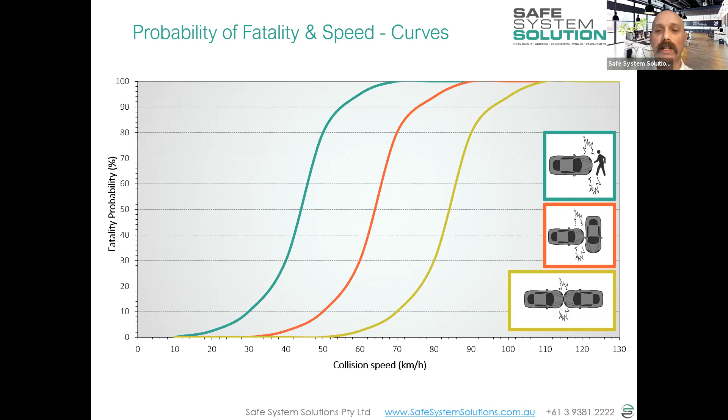And we've got some more information about angles in crashes, vulnerable road users in crashes, and crashes with poles, side impact with poles and the like. That's all in the mix to help you understand that severity score you're going to give for the crash type you are envisaging in the design or in the existing conditions. And it's not meant to be that you say above that speed everything is bad, and below that speed everything is fine. It's a sort of spectrum.

It helps you get some clarity around the scoring. And as I showed you, and we've uploaded there, we're playing around with some sort of graded scoring sheets in terms of colours to help just give that impression of a general indication.

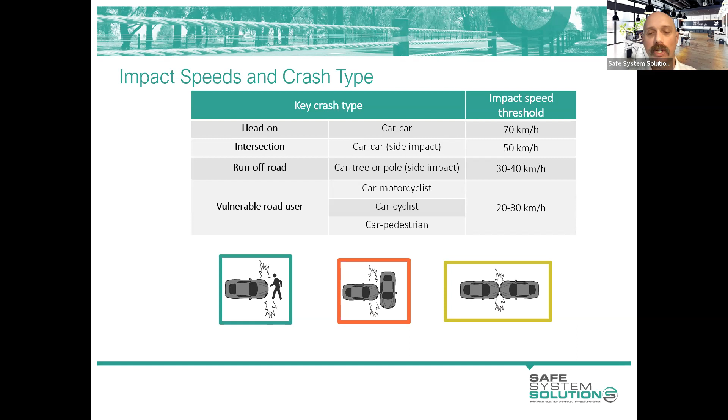So I think from those early sessions, looking at some of the specific vulnerable road users and their characteristics, looking at treatments and categorizing them into impacting on exposure, likelihood and severity, I think we're pretty well placed to jump into now the mechanics of the safe system assessment.

So the overarching document that a lot of you will be familiar with, or at least know exists, is the Austroads Safe System Assessment Framework 2016. As I say, this, along with a lot of sort of new tools being produced, was a first release, and there's been some discoveries of elements that maybe could be improved. Now some of them, the industry has done a little bit of work on, and we've got more clarity around them, and we've established a generally accepted way of operating, and some of our fact sheets help with that.

The local jurisdictional guidance, I think, helps with that too. So the Victorian guidelines and the South Australian guidelines - apart from the front cover, these documents are pretty much the same. So that helps us in a bit of sort of industry way to do safe system assessment.

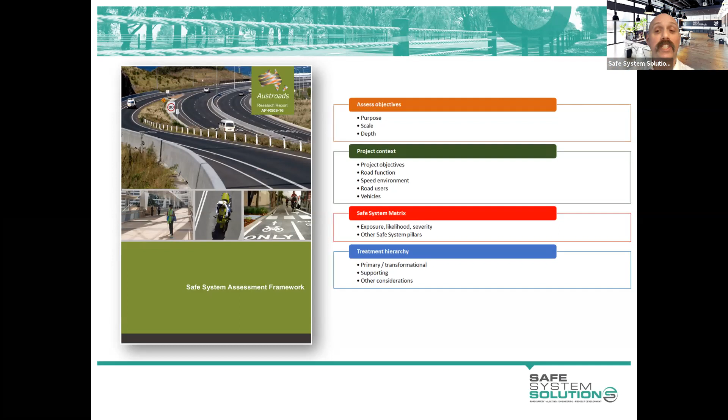In one sense, it is just a risk assessment methodology. It's just got some tweaks and some specifics around it that focus it in on, or make it more appropriate for roads as opposed to general risk assessment, and some of those safe system principle alignment with those.

So the first thing you do in a safe system assessment is to start to document or understand the purpose, the scope of this project, and the context in which this project is being undertaken. The Austroads document has these prompt questions. You are free to add prompt questions, find out other things, but you've got to paint a bit of a picture of what's going on in terms of what's the project, or if you're just doing an existing condition safe system assessment, what are the existing conditions, what are the aspirations for that, and the like.

This is where you'd put in things like movement and place categorization, or road use hierarchy, or road function, growth, land use, different amenities, speed conditions, speed limits, any data you have, any modeling that might be available to get an understanding of changes that could be happening, the types of road users that are there, vehicle composition, or any other things that help set that context of the project.

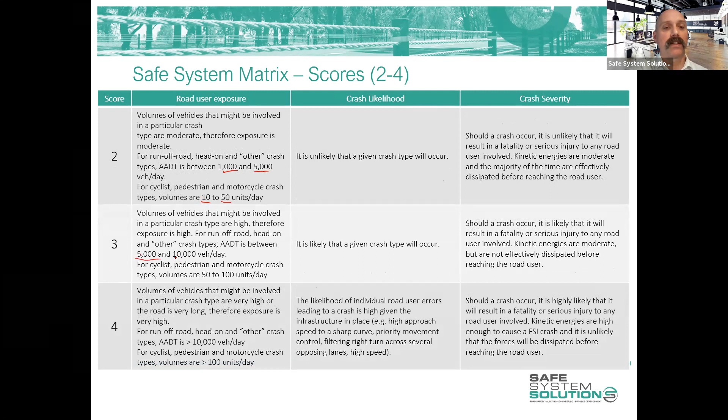Now remember, these are scores just to help indicate risk. So going up to 2, 3, and 4, you can see a 2 is between 1,000 and 5,000 AADT for passenger vehicles, between 10 and 50 for vulnerable road users. A 3 is 5,000 to 10,000, and a 4 is above 10,000, and 50 to 100, and 100 plus units a day crossing or being exposed to those crashes.

Now there's a bit of debate around these numbers and whether they're right - 10,000 vehicles a day in the scheme of things isn't a huge number on a lot of the major arterials or the like, so there's a lot of projects that get a 4 across the board for exposure, certainly in a lot of the crash types, but they are what they are for now, and they're fairly clean cut in how to get to that score.

So some of you got a bit of feedback in your assignments about exposure, and I think you complicated it a bit more than you needed to. If you had seen and read this, it probably would have cleared things up. But really the exposure is just saying, here's the number and it correlates to this, and that's the exposure score. It's as easy as that.

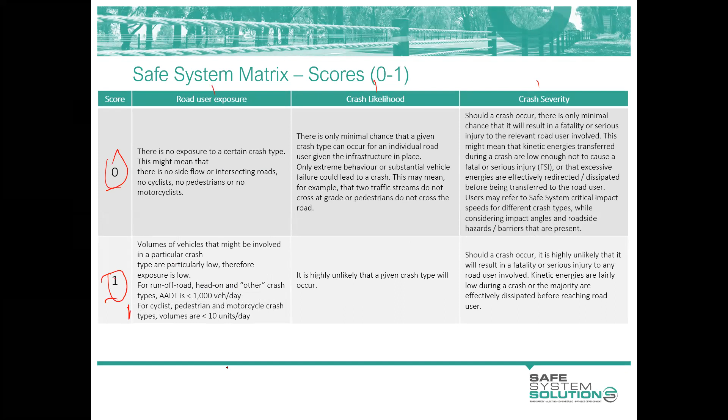A score of 0 means there is no exposure to a certain crash type. That might mean there's no side flow or intersecting road, no cyclists, no pedestrians, no motorcyclists. So you might be doing a mid-block section of freeway or something where there's no side road, so there are no intersections. Your exposure to intersection crashes is 0.

It may be that, let's take a motorway where cyclists are banned, and you genuinely don't have any cyclists on the motorway. That would be a 0.

Now, it's pretty rare to put a 0, but maybe that motorway cyclist example is a good one if you've banned cyclists and they generally comply. But people say, what about that random Dutch tourist who arrives from the airport, puts on their backpack and rides their bike down the motorway? With those sort of things, it's probably not enough, once a year that something will happen, to warrant scoring it above the 0.

But I might make a note of that in some of the other areas within the Safe System Assessment Report, which are less quantitative but more qualitative. And it wouldn't stop me making a recommendation if I thought that very random event could be something to be thought about.

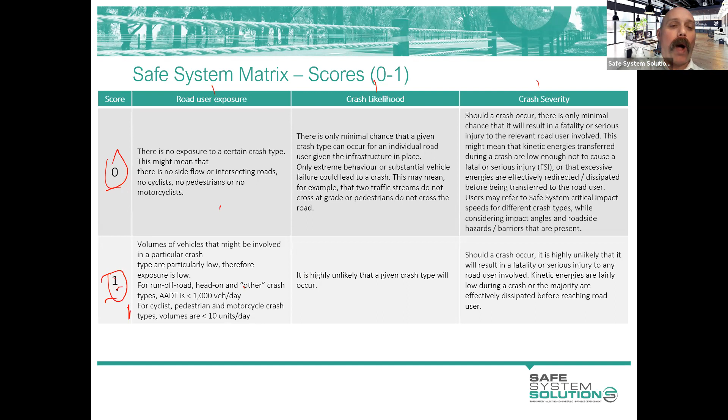So let's have a look at one for the likelihood scoring. A 1: it is highly unlikely that a given crash type will occur. That's it, that's all the information you get. Let's go up to a 2: it is unlikely that a given crash type will occur. A 3: it is likely that a given crash type will occur. You can immediately see the subjectivity to this, can't you?

A 4 has a little bit more information to it, doesn't it? The likelihood of individual road user error leading to a crash is high given the infrastructure in place, e.g. high approach speeds to a sharp curve, priority movement control, filtering, right turn across several opposing lanes, and high speeds. So you get a little bit more of an indication there.

A 0: there is only minimal chance that a given crash type will occur for an individual road user given the infrastructure in place. Only extreme behaviour or substantial vehicle failure could lead to the crash. This may mean, for example, the two streams do not cross at grade, or pedestrians do not cross the road. So some of that could be pushed into the exposure score to a degree, but the reality is it's very, very rare.

I don't think I've ever given a 0 for likelihood, and that is because we are dealing with humans and they make mistakes. So there's always that something there. But you do this as a relative score, a likelihood score. So the reality is that...

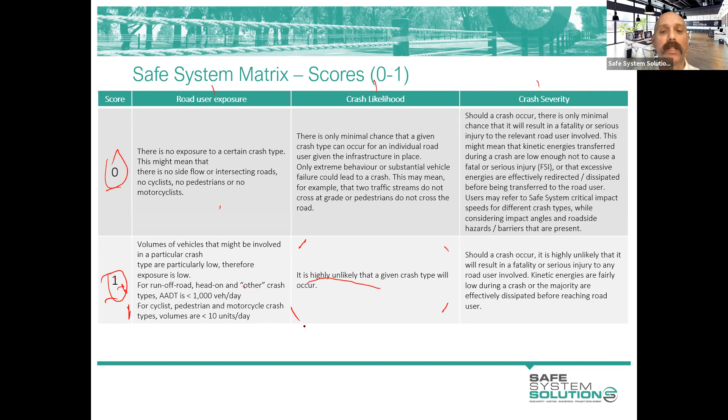So you get there and you start to mark your scores. Maybe 2, 1. No, let's give that a 2 because head on. No, if it was a low volume road, you'd probably put your head on lower than your runoff road, obviously, because your runoff road could happen all the time. But for a head on to happen, it would need the opposing vehicle there. There's that research paper I referred to earlier saying around 6,500 vehicles a day is actually where that change happens.

Intersections. Now the intersection, we've taken the intersection score from the addition of the mainline AADT plus the side road AADT. That was, again, a bit unclear - that one's probably still up for debate. There's a lot of people who say, well, no, it should be just the minor road, because you can't have a crash without a vehicle coming from the minor road. But nonetheless, we produced a fact sheet on that as an interim stopgap before the jurisdictions in Austroads actually make some decisions on that.

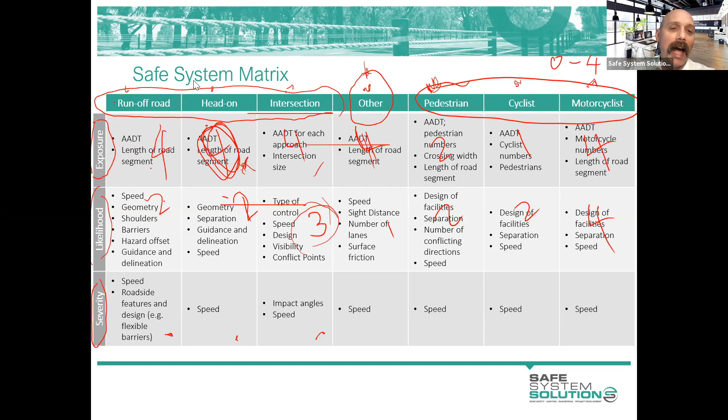I'm going to go a 4 there because runoff road into poles and trees can be pretty severe. The head-on's down at a 2 because it's less. This is a complete hypothetical, I'm just rambling things off the top of my head at the moment. It would be absolutely about analysing your thing.

Intersection, we're going to go in between as a 3. Other, we're going with a 1 because maybe we're just thinking about side swipe crashes and we know that they're quite a low severity crash type. Pedestrians, we're going to go a 4, cyclists a 4, motorcyclists a 4 - vulnerable road users - and maybe the scenario is somewhat high speed, so when the crashes happen, it's going to be bad.

And so you've managed to sort of score all of the cells of the matrix. And then you go about multiplying - you multiply the exposure by the likelihood by the severity to get an end score, and you get 32 off that one, would you? 16, 16, 32, yes. So you've got 4 times 2 times 4 is 32, and you go about doing that for all of them.

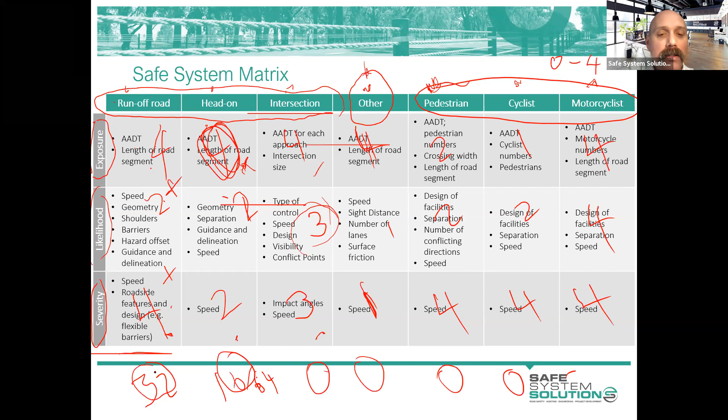It's starting to get a messy slide. So you get a score out of 64 for each of them, and then you add all of these scores up - add them across the bottom to get a score out of 448. 0 being perfect alignment with safe system principles, 448 being the worst alignment with safe system principles. Your project will be somewhere in that spectrum.

Now, you can see in the severity score in the reference sheet, you've got some information. Again, it requires you to have an understanding of biomechanical tolerance of injury and crash forces and kinetic energy, which you all have now. Should a crash occur, it is unlikely that it will result in fatality or serious injury to any road user involved. Kinetic energies are moderate, and the majority of the time are effectively dissipated before reaching the road user. That would give you a 2.

And you can see it goes up there to 4, being: should the crash occur, it is highly likely that it will result in fatality or serious injury to any road user involved. Kinetic energies are high enough to cause fatal serious injury, and it's unlikely that the forces will be dissipated before reaching the road user. By meaning dissipated before they reach the road user, that's sort of energy absorption through barriers, through impact absorbing features, crash cushions, attenuators, or angle of crashes. So the energy's obviously still there, but it's just dissipated out into the environment or something like that.

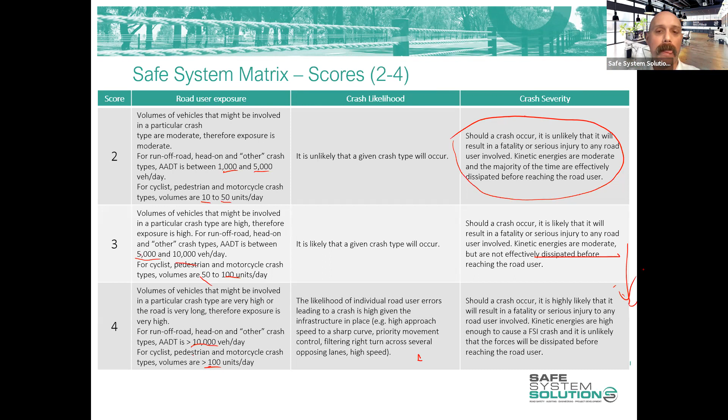I'll pause there before I show you an example of a completed matrix and see if we've got any comments or questions at this stage.

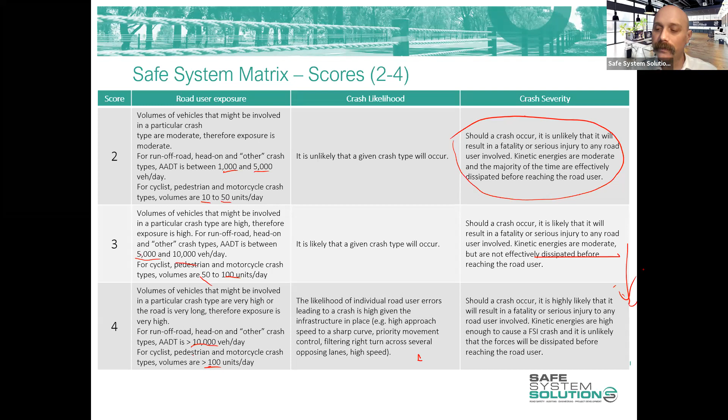Thanks, Ken. Where do e-scooters sit? Are they pedestrians or? Okay, so it's a good question, very good question. You get to make that call. If you believe you want to just say this is a different road user - tempted to lump it into the pedestrians as we do a lot of the time - but no, it's specific. The volumes are there to warrant it being categorized as its own thing.

Use the other category, and then when you do your AADT, put in your estimate on the number of e-scooters. And then obviously things like your severity will be influenced by their vulnerability, the likelihood by how they're being used and the infrastructure that's in place and those sorts of things. So you can sort of focus on and isolate it within that.

Now this is probably going beyond what we should be, as we're just entering you into doing this sort of stuff - there is the ability to do a single matrix for a road user like that on its own. So you could, in theory, take e-scooters as your entire matrix and do a full matrix on e-scooters, the way I was talking about doing motorcycles, but even bigger and wider than that. But you would then be looking at what is the exposure of them, and the exposure is just going to be how many are out there, so that'll probably be the same.

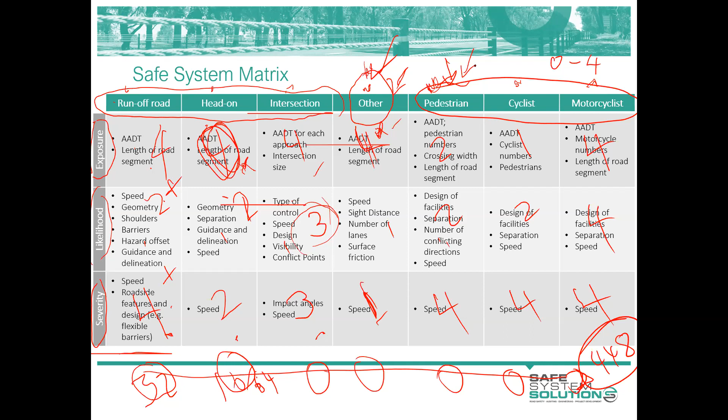Okay. Can a project have more than one safe system matrix completed? Absolutely. We did 61 matrices for Northeast Link, which is a $9 billion road project being planned here in Melbourne. 61, I think it was.

And that's certainly appropriate for the length and the changes in homogeneous sections and the different intersection forms and the like. So again, we've done a specific fact sheet on how you deal with a long project that has changes in land use or multiple intersections in the project length that are completely different. Really, there are two options - I have a colleague who likes option 2 and I like option 1. Option 1 is just to break it up into homogeneous sections and then do a matrix for each.

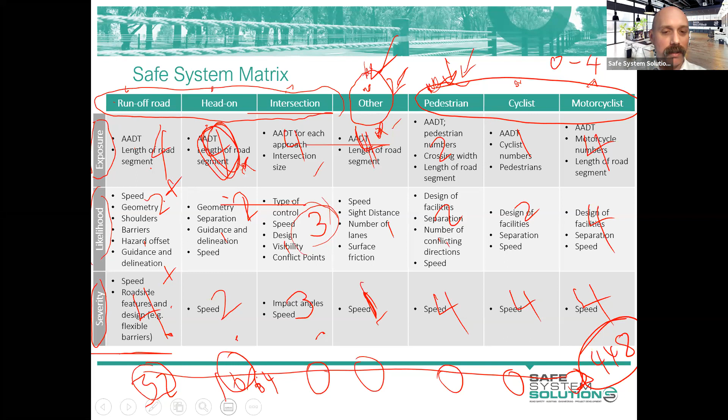And you can make a nice little graphic of that. Let me clear this - sorry, bear with me. I'm going to draw right over the top of this. You've got this length of road, and it's got an intersection there and a different intersection there, and you've been asked to do a safe system assessment on this whole upgrade.

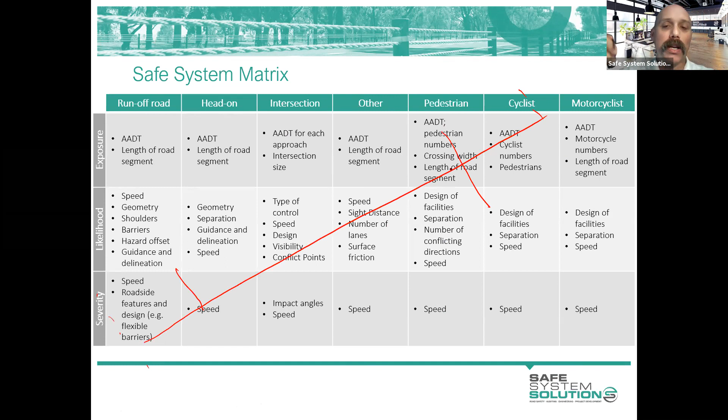Well, then you can say, I'm going to split this into 2 sections or 3 sections, depending on how you want to do it. I'm going to take all of this as one, and do a little graph of that - you'll see the graphs later as I show them. These are the results, basically.

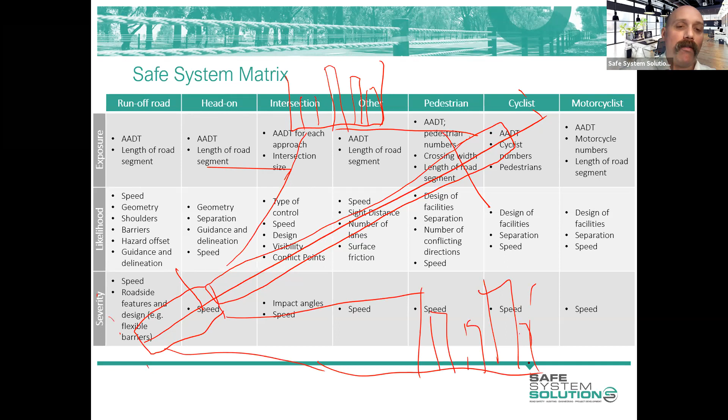And I'm going to do this intersection and this little lead into it as another, because it's a different scope, and then create a nice little secondary graph there. Maybe the volume changes significantly at that point, or the intersection form is completely different - this one's a roundabout and this one's a give-way or something like that. So that's one option.

The other option is to do a weighted average of your score across the sections. You won't only come up with one scoring matrix and graph, but it'll be a weighted average based on however many sections you've chopped it into, to arrive at your weighted average.

That can give you lots of spreadsheets at the end of your safe system assessment. The reason I don't particularly like that way of doing it is the safe system assessment framework is a fairly broad brush tool for identifying risk. We put numbers to it, we get a score out of 448, but we shouldn't be too worried about the precision of that. What I find almost laughable is when project teams have a score of 400, then do their project alterations and get a score of 398, and they say, yeah, we're doing a great safe system job. The broad brushness of it means you're pretty much the same. You're not doing anything new there.

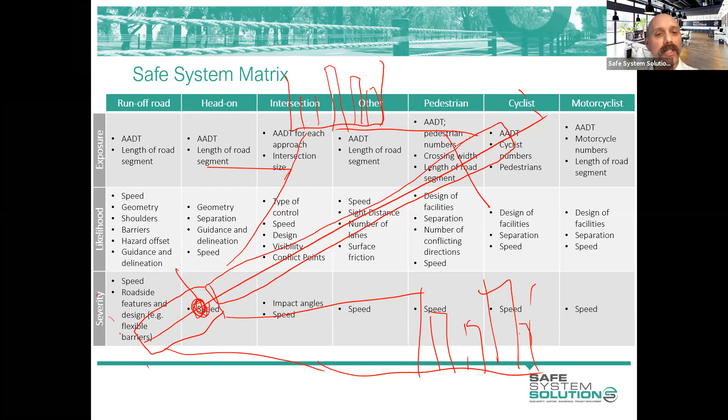What are the weighted averages based on? Volume, crashes, or number of segments? I see what you're saying, what are they weighted on, how does he weight them? I think he weights them on volume, but I'm going to have to double check. As I say, I don't use that method.

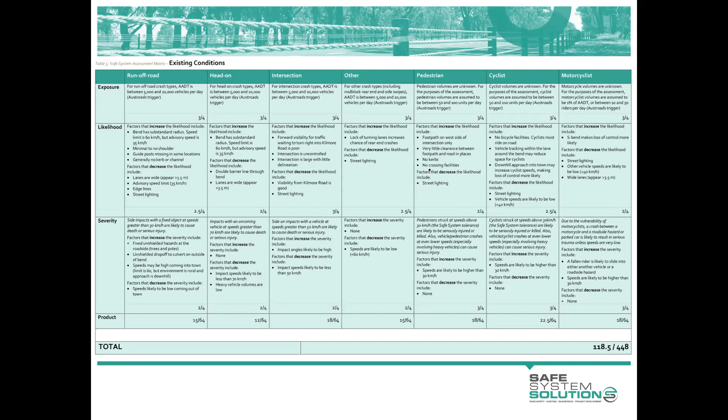And this is Chris Hall, who's much smarter than me. Let me double check that.

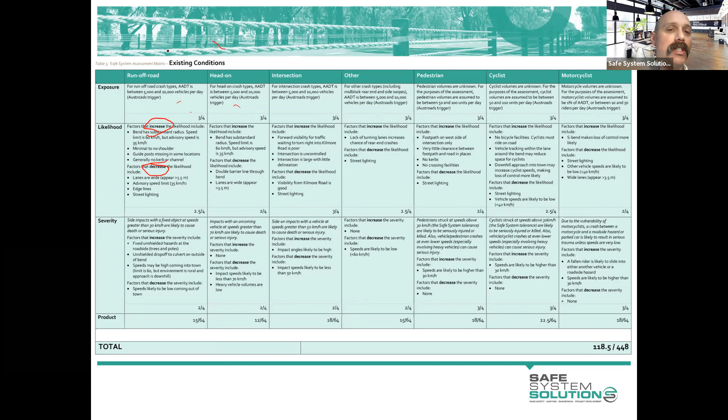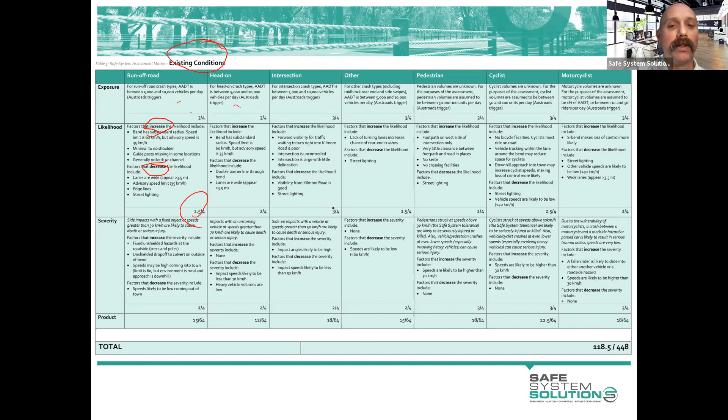You'll see that when you get to the likelihood scores in the matrix, there's some justification of it. The justification of your score is split into two categories: factors that increase the likelihood, and factors that decrease the likelihood, and you just dot point those out. So you look at the existing conditions, in this case, and dot point all the different things you've seen that make you want to make that score higher or lower. Those are the infrastructure characteristics that are there. You dot point lots of these out, and then you put your score there. This one got 2.5, then the 2.

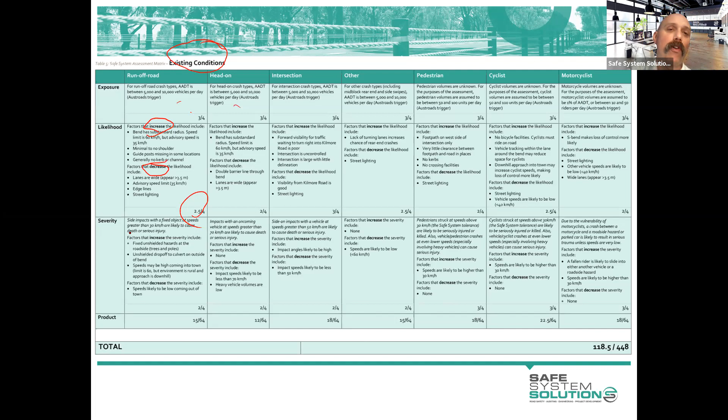Then you do the same for the severity. What are the factors in there that are making you want to make that severity score higher, and the factors wanting to make it lower? They're going to be the speed and the roadside hazards and the like. So you put lots of that detail in there, and you do it first of all always for the existing conditions. So if you've been asked to do a safe system assessment on a proposal, you still do the existing conditions first. You look at it, you give it a score. That is your baseline, your reference. That's where you're going from.

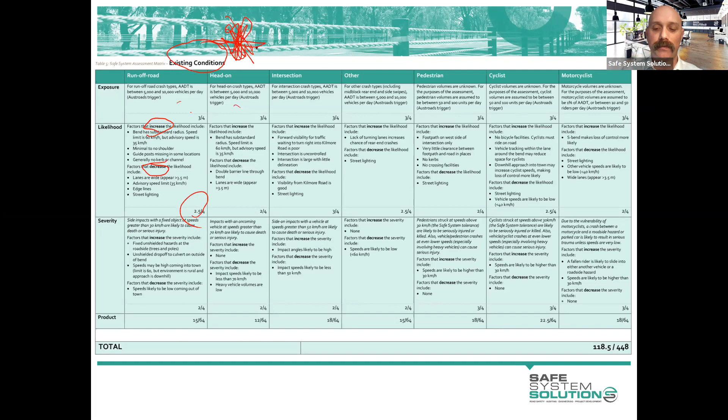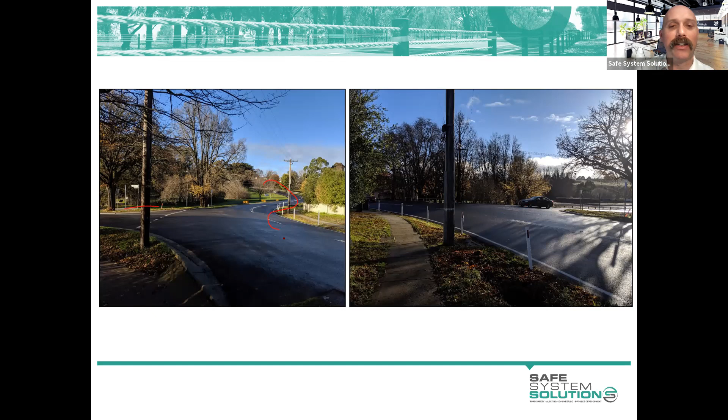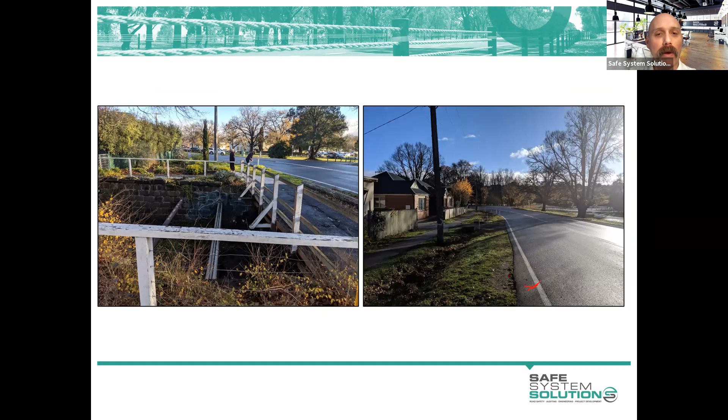So this one that we're looking at here is this new intersection, this existing intersection, sort of comes down a hill and enters into a township. There you can see a bit more of it. It's got some vehicles turning in, a bit of a drop off there, some trees, some power poles, and a big creek drainage structure.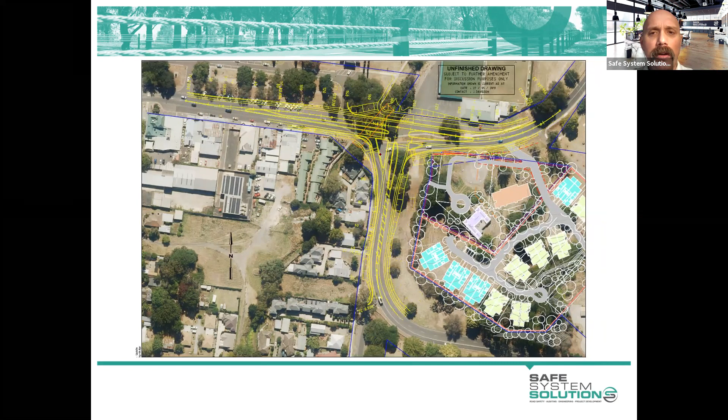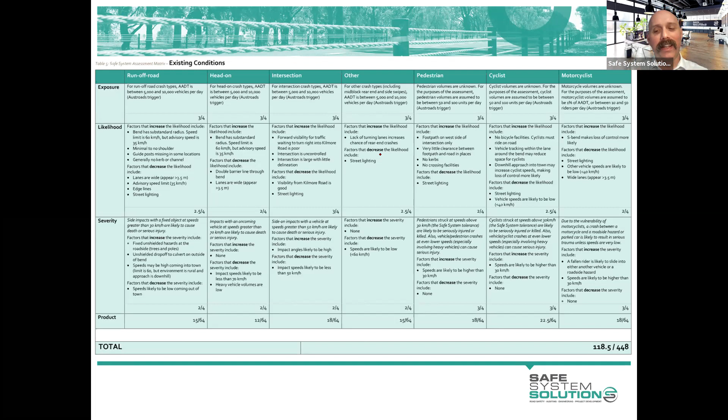So you take your existing conditions matrix where you've filled out all the information about the exposure, all the factors that influence the likelihood, all the factors that influence the severity, and all your scores, and you copy that, you paste it, and then you look at the design and say, right, these things are going to change.

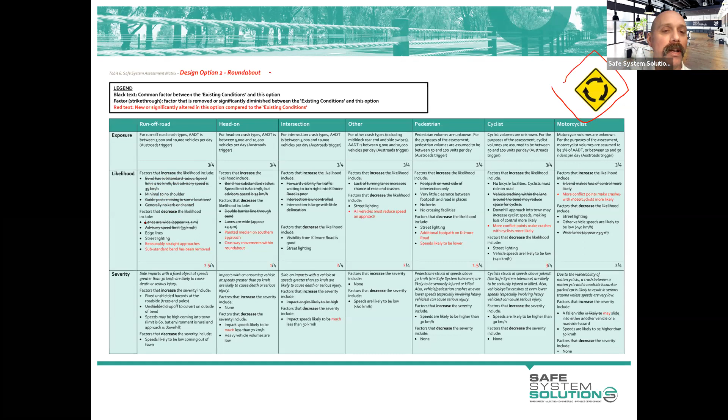And so here we are now, the matrix for the roundabout. You can see I just put a little something to help the reader identify which matrix we've got here, a little roundabout symbol, labeled roundabout. And then used a combination of crossing things out or adding new things with red text in the matrix. So you can see we've crossed out some of the things that were increasing the likelihood, and some of the things that decrease the likelihood of runoff road have been crossed out, and some new things have been added.

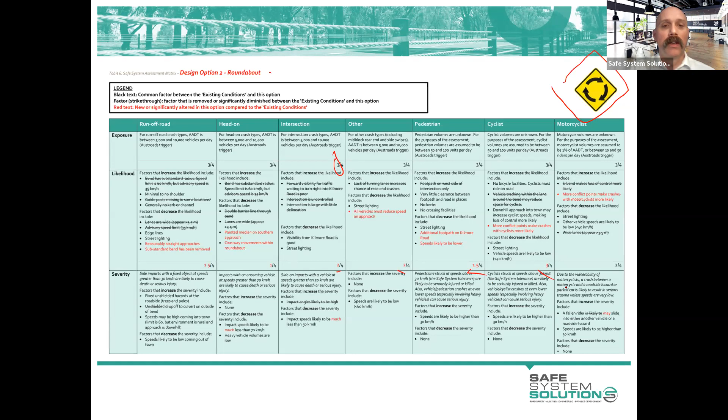So you go through and do this for all the different things associated with the likelihood, the severity, and the exposure. If whatever's happened has altered the exposure in your mind, you would change that score. You make it red, as you can see some of these are red because those scores have now changed based on what is being proposed. And then you do it for the next one, and the next one, and for as many options as they provide you and that you would like to score.

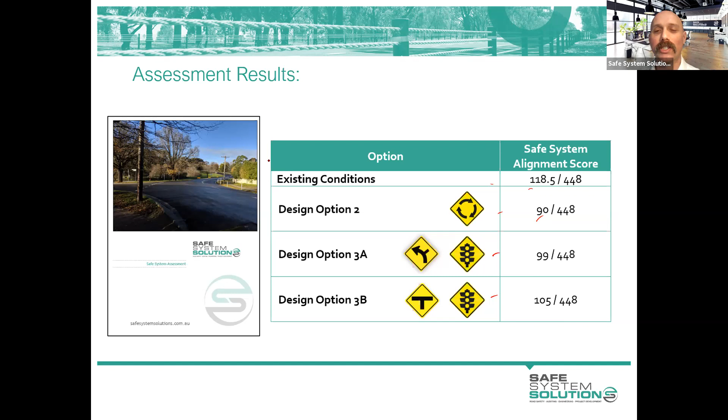So what we want people to be doing with the outputs of these is saying, instead of 'it's better to invest there than there,' to say, okay, I got 118 originally. The first thing they should be saying is, okay, everything is improving road safety, that's good, or improving alignment with safe system principles. The roundabout seems to be the best, but what else can we do to bring that score down? And if we decide to go with this one, what can we do to bring that score down?

And that's where you come in with recommendations. Now often, and in fact in the template, I think it's sort of 'ideas for consideration' that's put in there, not necessarily recommendations as such - ideas for the project team to consider that will bring that score down. And this is where you put in all those different ideas, like a raised platform, or a separated shared path, or whatever you think would bring that score down.

And you categorize these into primary or supporting, or non-safe system - I hope you wouldn't be recommending any of those as your ideas for consideration, but you may use that vocabulary in commentary in there. But let me take you through these.

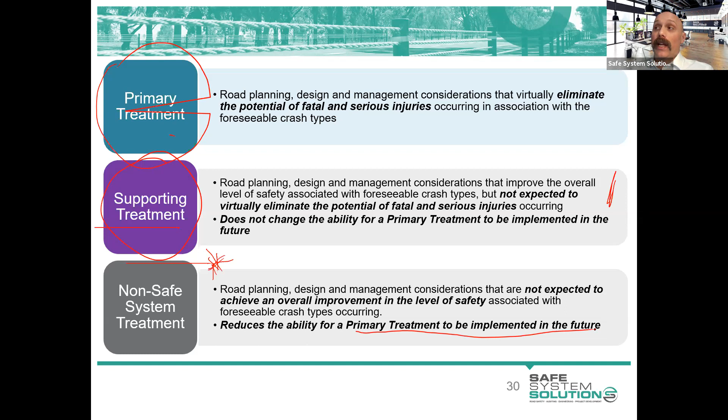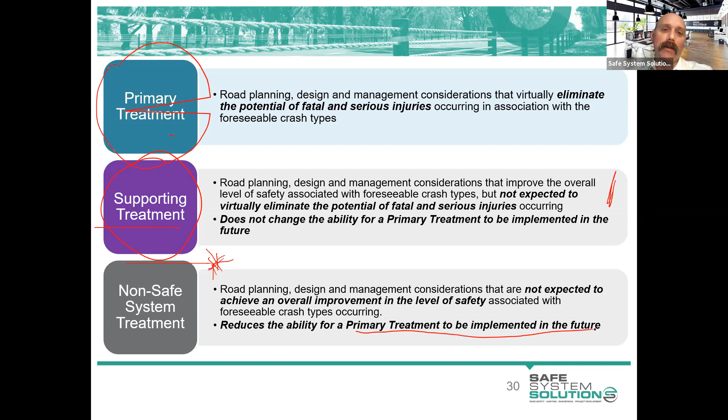So the barriers one, I can't think of a scenario that would meet that, because you're basically putting out your primary treatment, which is barriers, and then down the track you're going to have to rip them out and move them again, or whatever you're doing, duplicating the road or the like, and replace with barriers. But for the interim, you've got a primary treatment for runoff road.

You might be thinking head on then, or it reduces our ability to put a median barrier in. Well, I think there you'd probably have to be cutting it as non-safe system for head on, but primary for runoff road, which would be quite an odd little thing to do. Most people just have it as a primary and then note that the challenge is inability to put the central barrier system in the future, which would be a desirable outcome. But maybe your recommendations or your ideas for consideration would be to widen, clear, so there's the ability to put the central barrier system in the future, which they may not be able to afford to do, but at least you've sort of helped and thought out about that.

Okay, thank you, Kenn. A couple more questions. Just to confirm that we should state what we have determined as other, to assist the person receiving the report. Yep, yep, and it's easiest to do that in the exposure category.

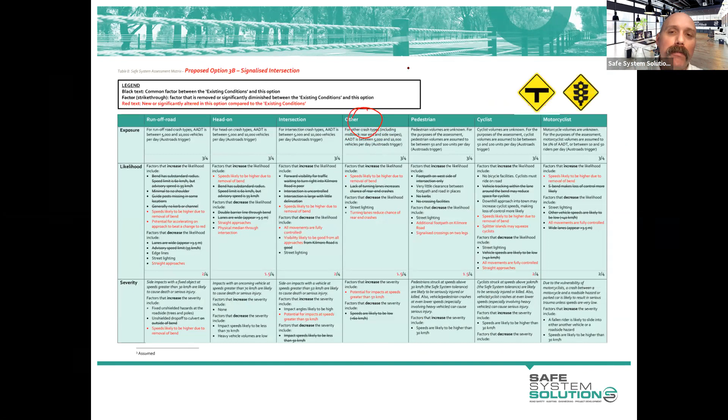Gee, I wonder if it was done in. Okay, so this one sort of said including mid-block rear end, side swipe crashes. So that's another clarification I need to make. Rear end sits in other if it's mid-block. It sits in intersection if it was influenced by an intersection. So the other rear end would have to be from pedestrian operated signals, or like mid-block crossing signals, or maybe exits from driveways or something like that. So it's not intersection related as such. If you're worried about back of queue style issues, that sits within the intersection as well.

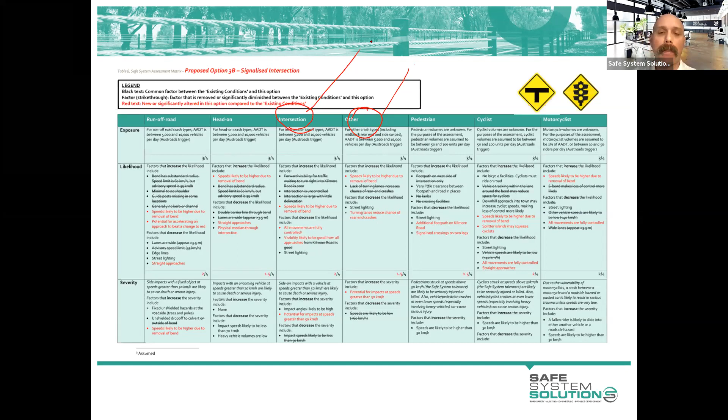Okay. Does providing an alternative route for some movement types elsewhere in the network fit within this as a secondary treatment? For example, improvements to a cycle route to encourage cyclists elsewhere.

So how would you do that? I would put that probably as supporting, unless you believe you can actually get all of the cyclists to use that by doing whatever you're doing, and it's going to be pretty unlikely. You can certainly do things like, if you've got one route and you alter it so traffic goes via another route, be that cyclists, pedestrians or motor vehicles, you can do a matrix for both routes before and after, so you get that indication of how it alters, because you're going to push vehicles onto another route. Is that route any good? It's no good pushing them off one dangerous area onto another dangerous area, or into an even more dangerous area. You should be getting an understanding of that, and you can do that with two matrices, two graphs, and it can tell quite a story quite easily.

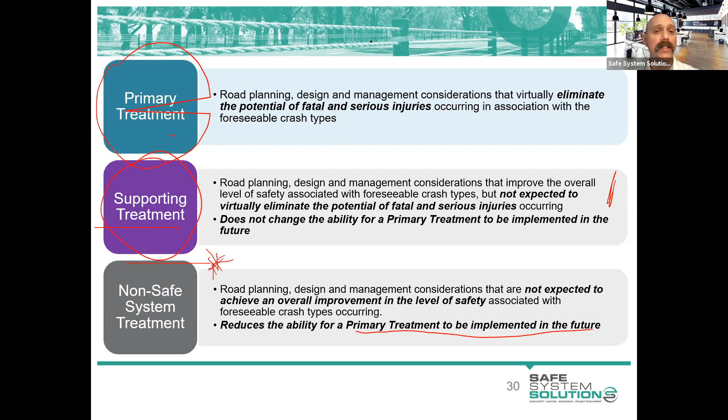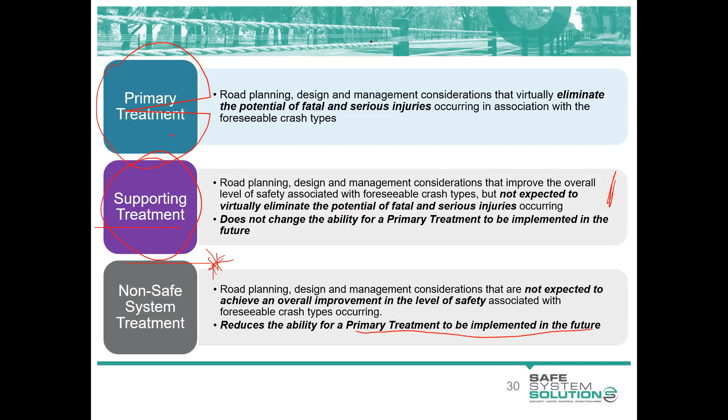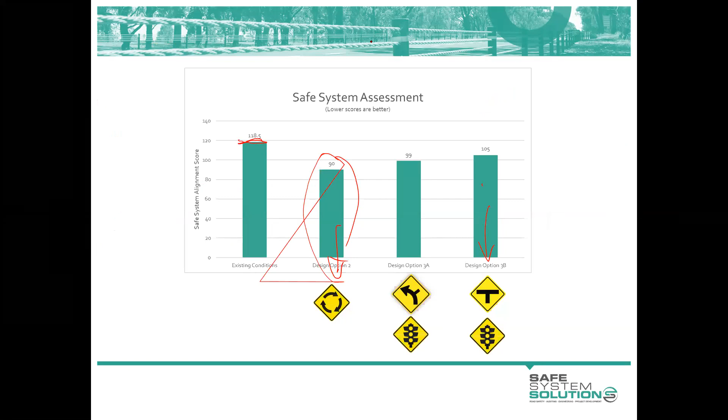One last question. The example had a score of 118.5 out of 448. Is it kind of suggesting this intersection is not a high-risk site? It seems like the safe system matrix can also be used to prioritise safety improvement projects.

Yeah, so to answer that, is it a high-risk site? Well, you will have a feel for what your scores indicate in that alignment with safe system principles. So I would tend to agree. I would say this is not horribly aligned with safe system principles at a score of 118, but it can certainly be better, absolutely.

So you could use that in prioritization of intersections or lengths or whatever it is, but be very aware of the subjectivity of it, and the difference in scoring between individuals and between groups. So you'd need to do something to calibrate everything across your program to make sure everything's consistent.

I've got my colleague Chris Hall, who I mentioned before, who's the guy who likes the weighted average and does all these more elaborate ways of safe system assessing. He's currently working on some standard scoring of different treatments to try to provide almost lookup tables or reference tables for different treatments, so we can get more of that consistency. But at the moment, nothing like that exists, and it requires a bit of judgment.

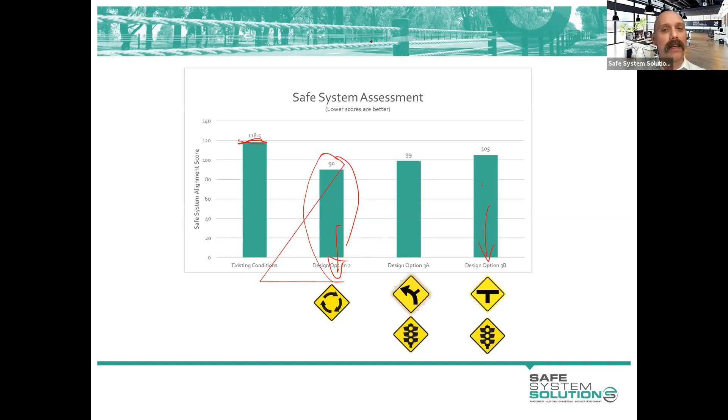So I wouldn't like to see something happen where, say, each region or each office puts in their safe system assessment scores of the 10 intersections, and then they're ranked by safe system assessment score, unless somebody centrally was to assess them all and score them all, and then they would be at least consistently ranked, and that would be an option.

So you ask these questions, or you are asked these questions as an assessor. Are road users likely to be alert and compliant? Are there factors that might influence this? What are the expected compliance and enforcement levels - alcohol, drugs, speed, road rules, driving hours. What is the likelihood of driver fatigue? Are you assessing an area out between two cities or something like that? Can enforcement be conducted safely, or is anything being altered that may impact on the ability to enforce?

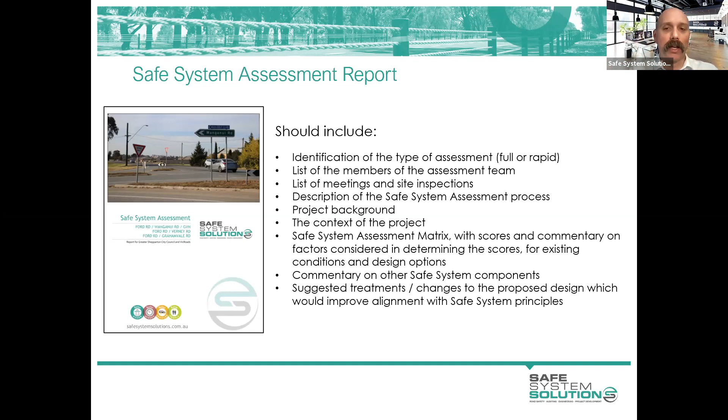And to make your life super easy for your assignment, and probably in future assessments, we've given you a template Word document, which is actually the Victorian government template for safe system assessments, and hopefully it'll help you. And it looks like this.

And what we've done is highlighted the things that you are going to change. So you're going to get the Word document from Schoology, the folder, or from your memory stick where it is as well. And you're going to take that Word document, and anything that is highlighted yellow, you are going to change.

So you're going to write a little bit about the background of the project, as you can tell from the design you get. You're not going to have enough information. You're going to want more information, I'm sure of it, but you're not going to get any. You get what you've got, and you can make some assumptions.

So probably for the assessment purposes and this sort of mock task, you can document any assumptions you've made. But you're going to have to go into Excel and create your own little graph, because we want to be seeing that, because that's what people want to see. You're going to go through, you're going to fill out the matrix, and you're going to put some other things in there. I'm going to jump to the Word document in a second, but I do want to talk about your site safety and ensure that you're going to be safe.

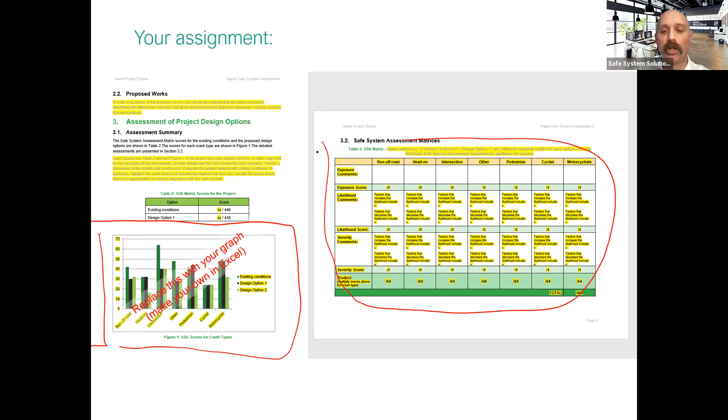You're all in the industry, and you all have no doubt worked around roads, some of you for many, many years, and you know how to do it safely, and you have good processes and practices. And I need you to follow all your processes and practices for safety.

Wear your high-vis vest. There's no need to be doing elaborate measuring of lane widths or putting your head down to look at the drainage crossfall or anything like that. Don't be a hazard to others. So if you're standing there, a few of you might be doing this in small groups. Don't make people wander around you out onto the road. Park safely. Don't cause safety issues with where you're parking the vehicle.

And we've provided a safe work method statement, and Kathy will correct me if I'm wrong, but I think you've got to have a look at that, and then in the quiz acknowledge that you will abide by that. And it won't be anything in there that you're not doing already from your own internal processes and practices. It's just our sort of assurance that you're committing to that. You're not going to go out there intoxicated or the like, and you're not going to do anything that's hazardous.

So Kathy, you can elaborate on any of that while I pull up the Word document.

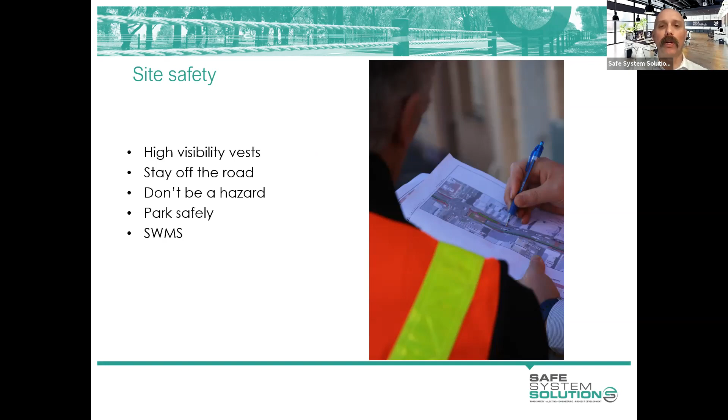Beautiful, thank you, Kenn. Yeah, look, it might be a bit COVID heavy, our safe method work statement, just because of where we're at recently. But what Ken said is spot on, and it's all in the Module 5 folder in Schoology. Well, certainly we don't want the Safe System Assessment course to be the source of the second wave in New Zealand. So, okay for COVID safe practices to be in there. I'm sure everybody in New Zealand is operating under lots of those considerations anyway.

This is the document. You can get these straight off the VicRoads website, download the Word document templates. And just to make your life easy, we're not going to make you fill everything out. You can use these. They say freely to take these, to rebrand them to whatever you want, to take all their logos off and whatever. It's just trying to make a consistent format of safe system assessment outputs, the reports.

So complete only the highlighted sections. We don't even want you to give us an executive summary, because that's just adding time to your task, which we don't want. Don't worry about updating the table of contents. Don't worry about giving us all the figures and everything like that. Oh, there's one highlighted yellow.

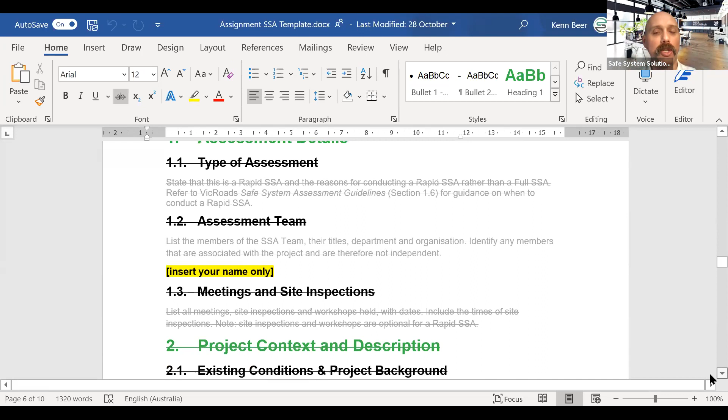And then, so the project context, you've seen we've crossed that out. We don't want you to fill that out. You don't have a lot of that information. But the proposed work, a short summary of what the works are from what you can see from the design that you've been provided. You won't have any information about other stuff. You might know a lot about the project.

You can put in as much as you want, but don't feel that because you've never seen this project, you don't understand the background or context of what they're doing. Just put in at least what it is—they're proposing kerb outstands and a raised crossing or something like that.

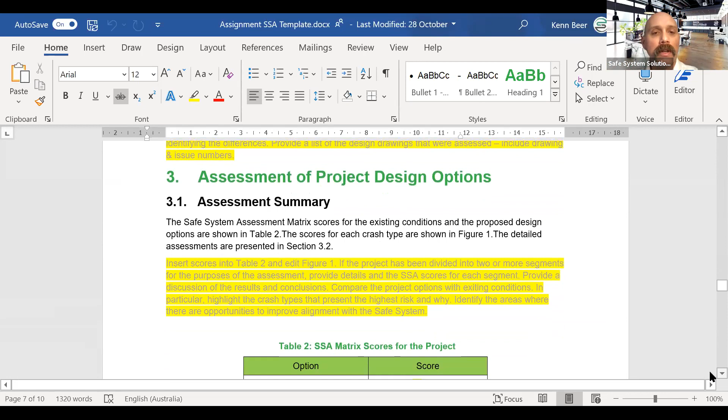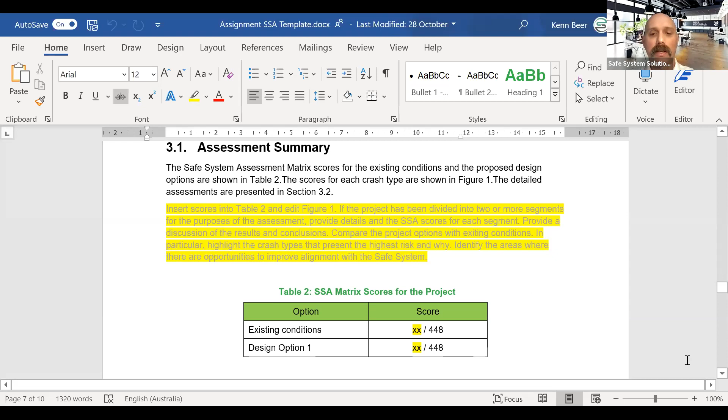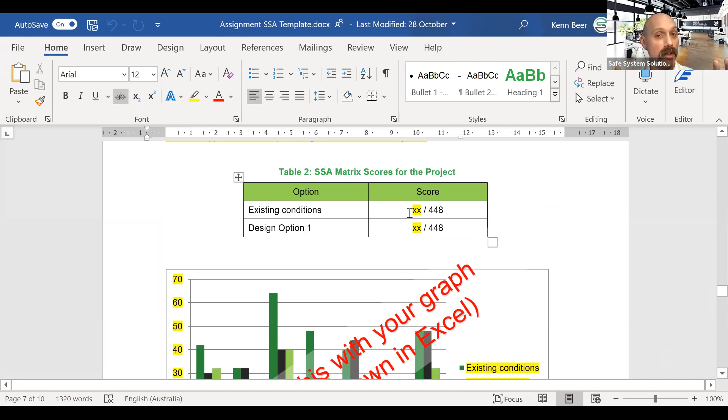Then you give a summary of the scoring and how it came out, and what influenced those sorts of things. You put the scores in after you've done some scoring—the overarching scores for the existing conditions, which you assess first, and then the design option. Everybody's only got one design option to put in.

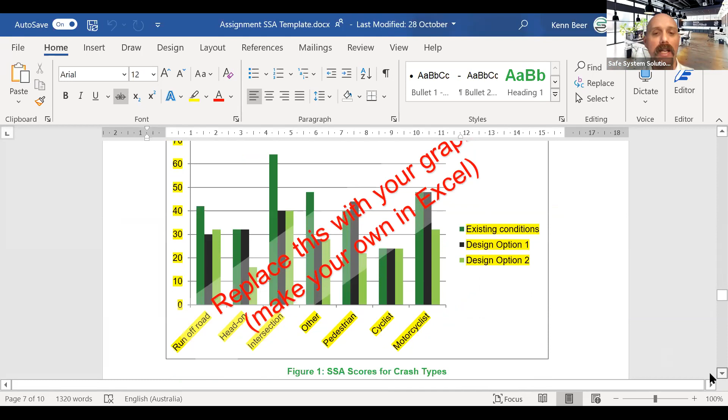You create your own graph in Excel—very simple exercise—but make sure you label it similar to this so we clearly understand what's happening. There's your matrix, and of course you start with the existing conditions, fill all of that out, then just copy it, paste it, and alter it.

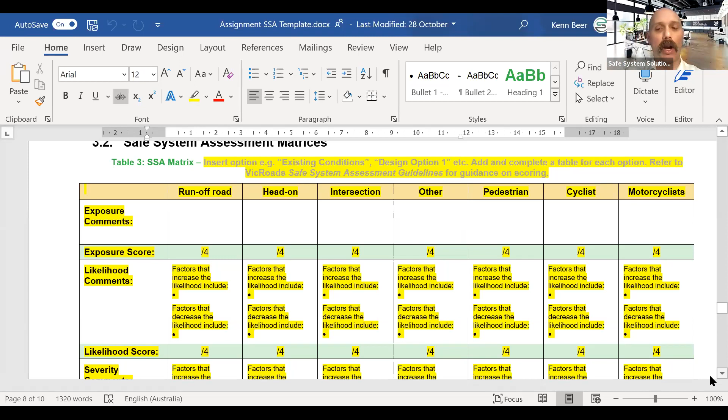So, exposure, likelihood, severity.

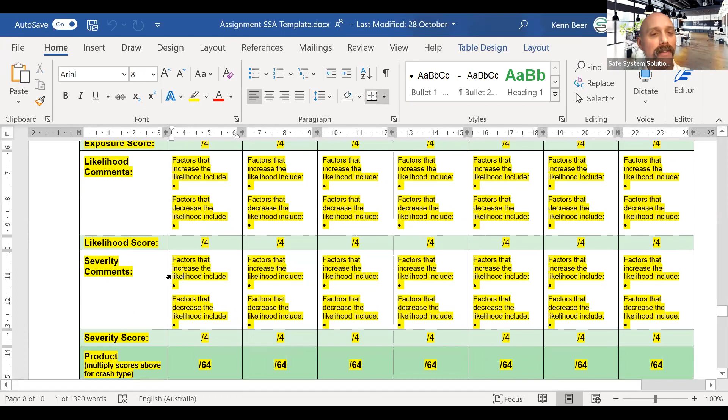Interestingly, this is straight out of their template, and they've stuffed that up—they've copied that text and copied it down there. I don't use their template because we've got our own, which they actually copied, but anyway, it doesn't matter. Just be aware that even though it says likelihood, you'll need to change that to severity. I thought I might have picked that up and changed it on the memory stick or Schoology, but I'm not sure I have, so just be aware of that. You'll be right anyway because it's in the severity line and you're all attuned to that.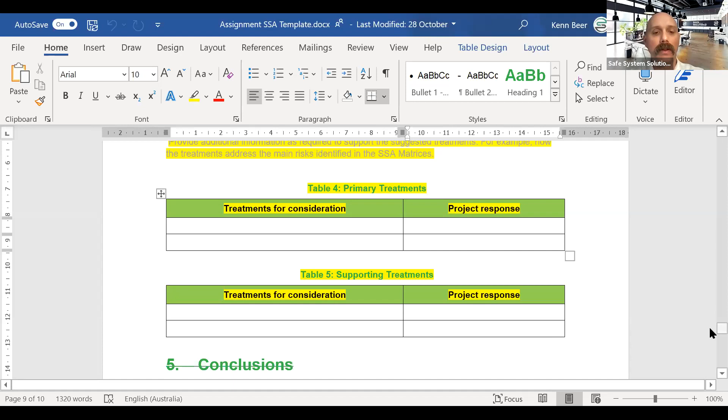We get a lot of people submitting them, and then they fabricate some project response. The reason that column is there is to remind whoever receives the report after you do the assessment that they've got to do something—change some things, make some comments. If they can't do it, they need to explain why. If we don't have the project teams acting on something, there's no point doing these assessments—I suppose unless you're using it for some other purpose.

And then add a photo—sorry, the last thing we want is a photo of you on the site, so no nice selfie or anything. That is for us to be confident that you went to the site.

And we still go to the site for a safe system assessment. Street View and things can do something, but there's nothing like getting out there and seeing how road users use the area, just getting a feel, walking around it. In my mind, you can't replace that, and it's documented in those guidelines that you go to site for a full safe system assessment. There are options in the rapid one to do a desktop-only version and the like, but certainly for full safe system assessments, for our confidence that you're getting a good indication of the experience, you go to site and give us a photo to prove you've been there. We can then keep on record that you've completed the safe system assessment course, done a safe system assessment, and been to a site—really been through that whole process.

Then you're going to finish it off—that's the last thing—and upload it to Schoology, and it will be marked. Kathy will talk to you a little bit more about the timing of all of that. I think that's about it—questions, and we'll talk about timing and things that need to be done.

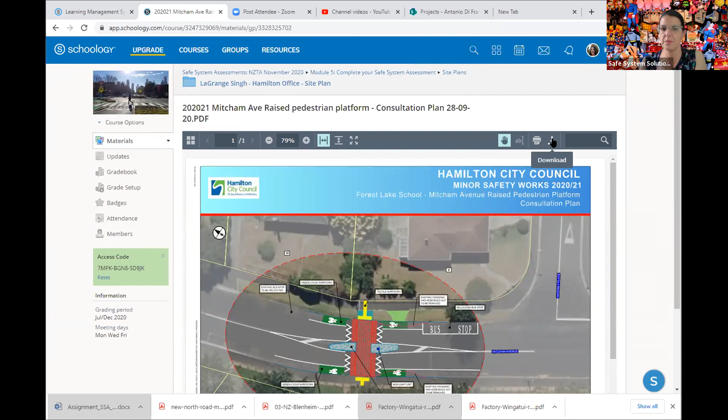Any other questions on that? That was good, doing that. It's really easy for people to find, and yeah, definitely download it. You're going to need to download the Word document definitely to fill it out.

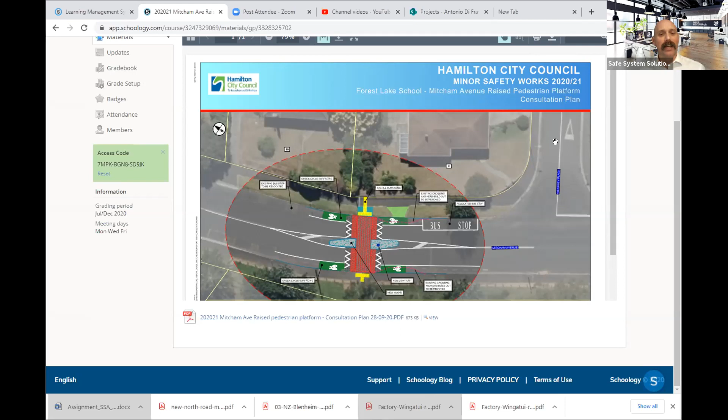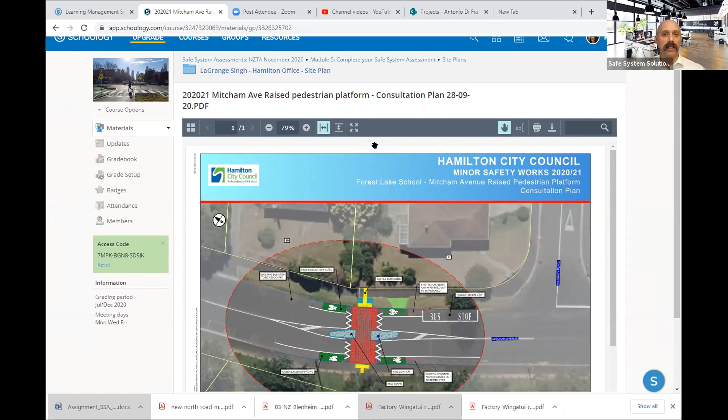Sorry, we do need to do a site visit, don't we, Kenn? Yes, yep. If you need to defer the site visit to a later point, we can work with you on that. But just for consistency on handing over certificates and what people have gone through, we want to make this consistent. We've required everybody that's done this course over the last 4 years to do a site visit, and we're not quite prepared to change that.

Certainly, if you're doing one for real, you'd probably be out there for a lot longer, and maybe even go out at multiple times of the day to see different things. But for this experience, you just get a bit of a feel for it. I apologise if you feel that's a bit of a waste of your time because you know the intersection so well, but again, it's just keeping it consistent for everybody, which is far easier.